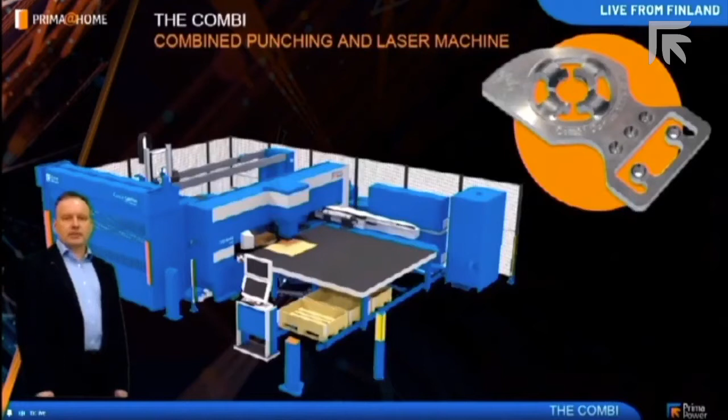The Combi is a combined punching and laser machine. It looks like a standard punching machine, but we have just integrated a laser into the setup. In the picture about the part, we see a few very typical details of what we can make in one setup: diamond marking, forming, tapping, bending, punching, and in the end, laser cutting. All in one setup.

First of all, the punching is done with the servo axis, meaning high accuracy, high tonnage, low power consumption. We have high tool capacity on our turret, all the tools available like that. Right next to the turret, we have a very flexible tool called laser. Combining these two technologies, we get the best of both worlds: low power consumption, high tonnage, high accuracy, and all the features and flexibility together with the laser.

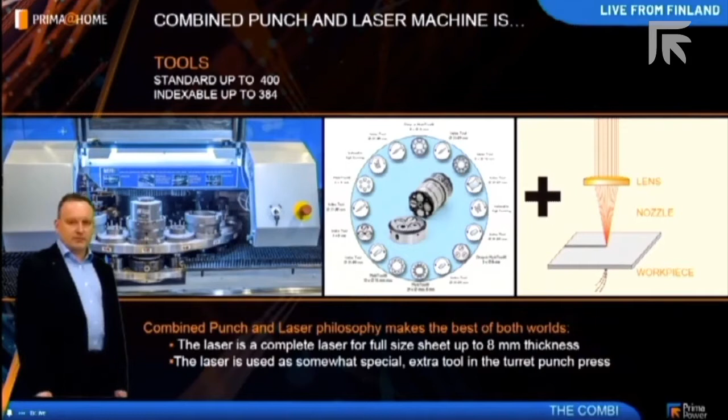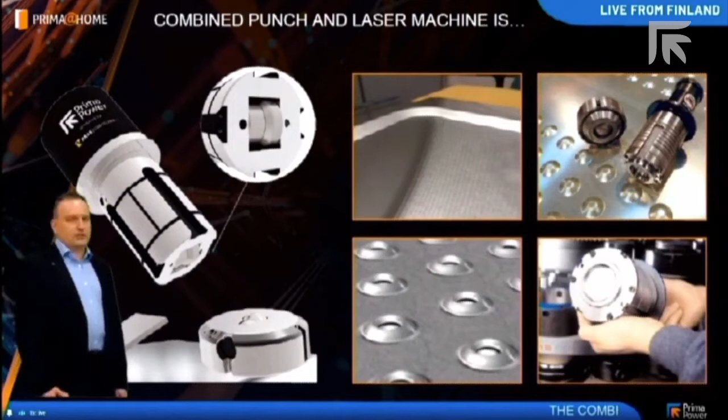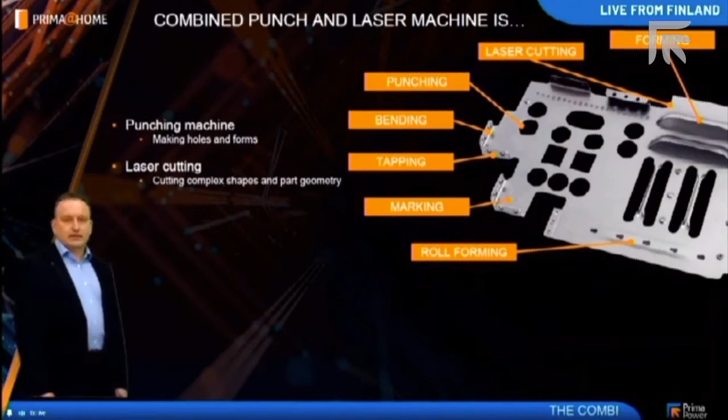These are typical examples of what we can make with our accurate forming. You might recognize these from your own parts as well. So, in one setup: punching, bending, forming, wheeling, tapping, and in the end, laser cutting. Together with the automation, we have fast and reliable part stacking from the cutting process.

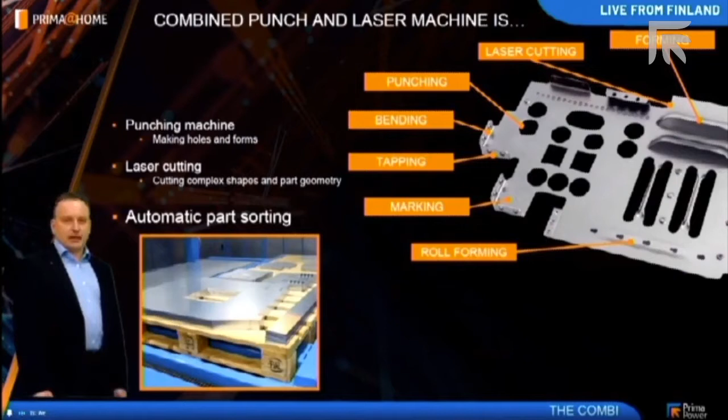So in practice, there are no limits for part design. Here we see a very complex corner opening, almost impossible to make with punching. We need the laser in order to get this skirt bending. At the same time, we have extrusions for tappings, for example, so we need the punching and forming capabilities as well.

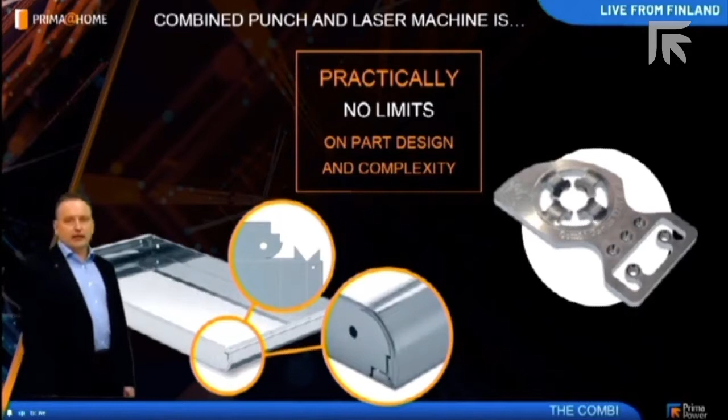We can start with a standalone machine with manual operations, all these mentioned features inside the setup. After a while, we discover we need more capacity, so we add a robot to the system to handle more valuable tasks while the machine is still running. Together with wagons, the world opens for a third stage when we bring storage into the system. With this combination, we have a fully equipped setup for lights-out production. And by the way, we have been building Combis for over 30 years already.

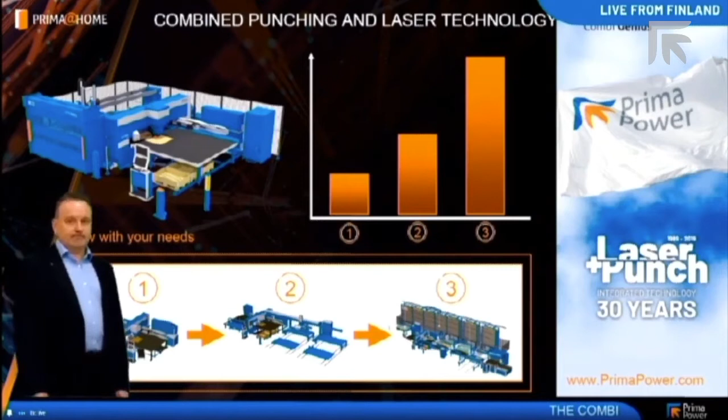We can make these parts with the standalone machine. To get more capacity, we have it with the automation. Even more capacity, we add bending to the process, direct connection. So laser punching, buffering and bending, LP-BB line.

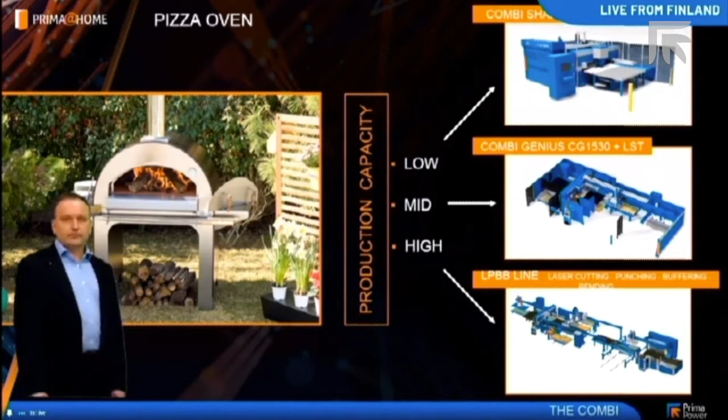When we need such combination, as seen on the example, complex parts, high radius curves, sensitive material, high volume. Typical material thicknesses, 0.5 up to 0.8.

Thanks to the forming capabilities, we give you tools to develop your products. Decrease material thickness, increase quality, and have cost savings. Typical segments: stoves, home appliances, kitchen products, cabinets. Also contract manufacturing, thanks to the flexibility.

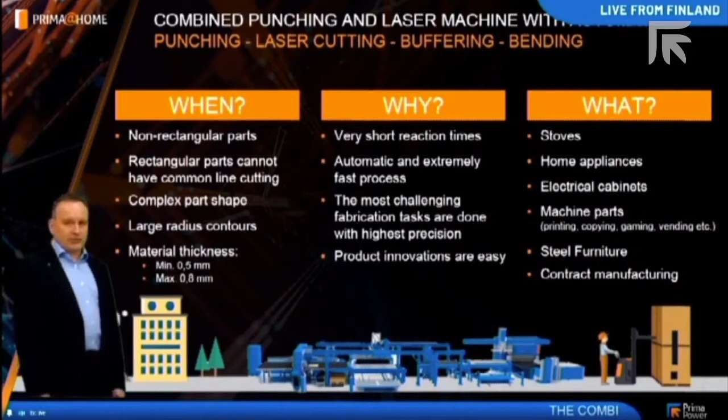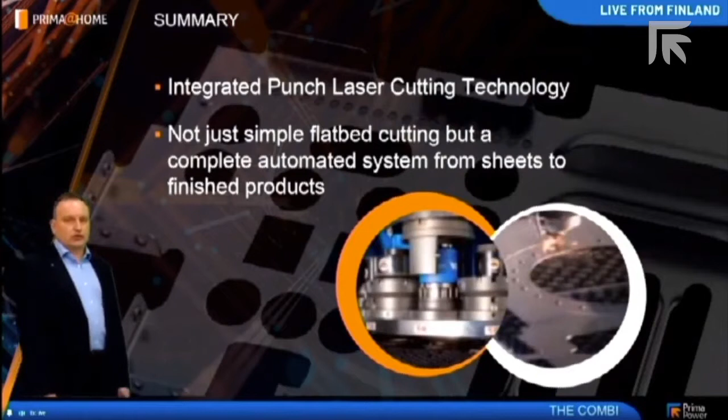So in summary, the combi, it's integrated punch and laser cutting technology. And not only cutting, but with the automation, fully equipped solution from sheet to ready parts.

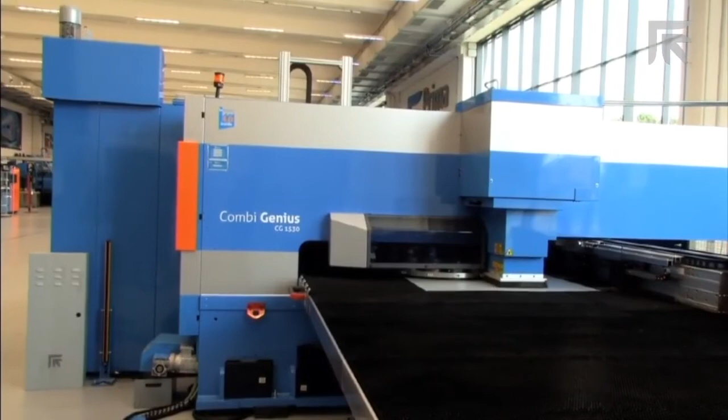Kevin, we have talked about the touchless technologies. This one, I guess, is touching. Yeah, it's touching a little bit, yes. But it's a servo-electric machine with the power of 30 tons that allowed us to reach the speed of 1000 hits per minute of nibbling, and allow us to cut and punch up to 8 mm of every material, so aluminium, stainless steel and mild steel.

The turret itself can have up to 400 tools, and it is equipped with 2 index mechanisms, one to rotate the tool holders, another one to rotate the ram. And these 2 features enable us to reach a number of 384 indexable tools in one turret, with an indexing rotating speed of 250 RPM.

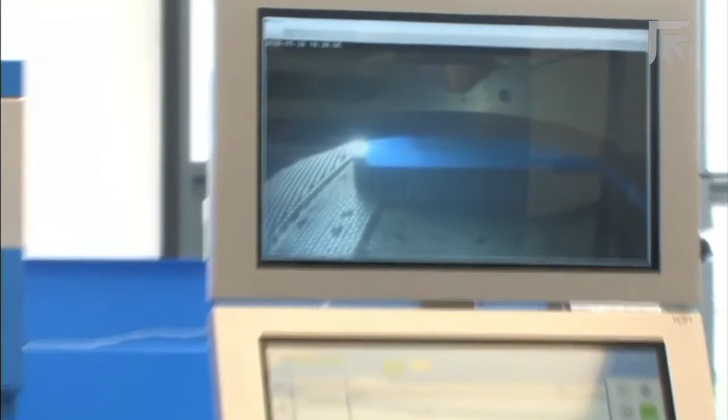Right now we are punching this part with the open chute run. We keep the work chute open, and we manage to unload each part in 1 second each. It's also possible to have other 2 chutes under the cutting head that allow us to unload other small and bigger parts as well.

Okay, now the machine is cutting a little bit bigger part which does not fit through the drop doors. We could of course unload it with the Compact Express, but we want to demonstrate how you can easily access the machine if you run single part production or prototypes, or some material which are very sensitive and you don't want to risk having any scratches on the surface. So Kevin will unload the part.

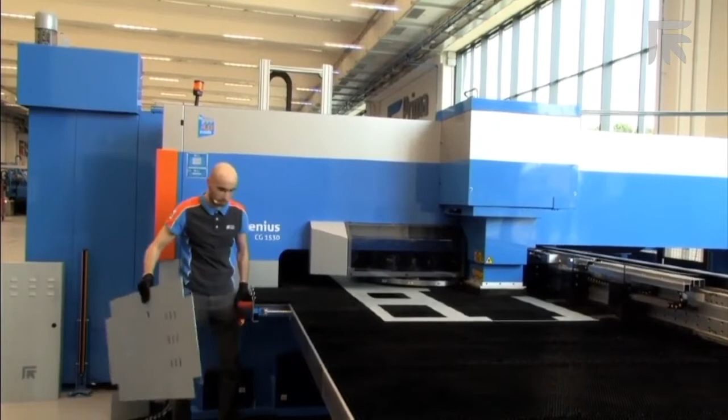So the machine stops as programmed. There is a fast opening door on the table. Easy to remove the part, close the door, and restart the cycle.

So this is the part that we cut. Here we can see a little bit of forming, and of course here on the bottom we have our logo fully punched. And here, next to the blank sheet, we have the ready bent part as a final product.

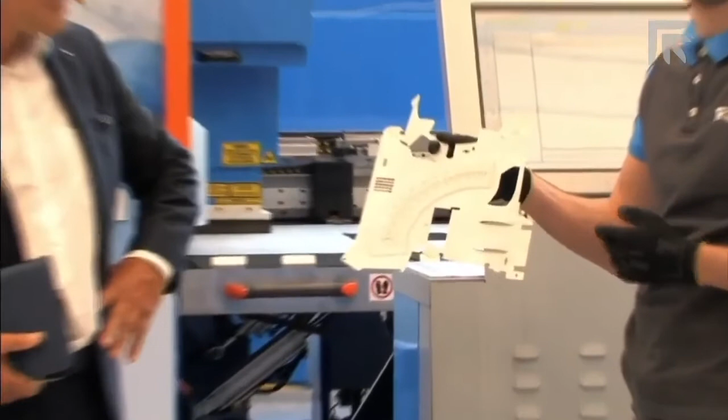It's beautiful, isn't it? Okay, but Kevin, here is one part which looks pretty complicated. Can you explain something about this? Yes, this is a very special part because it allows us to see the capability of the machine. Because here in this part, there is a lot of forming, a lot of wheeling, a lot of punching, and laser cut, everything inside one part.

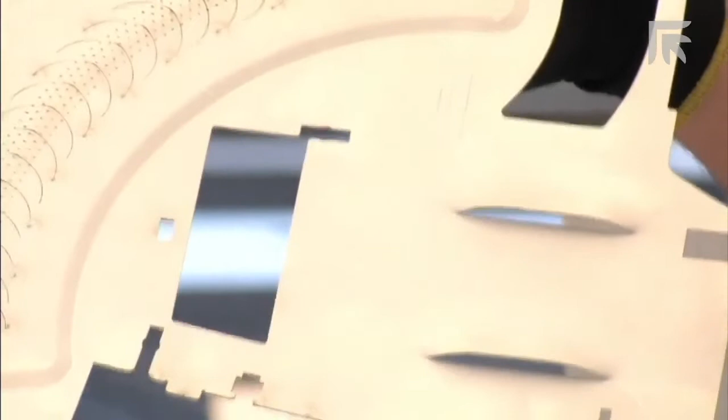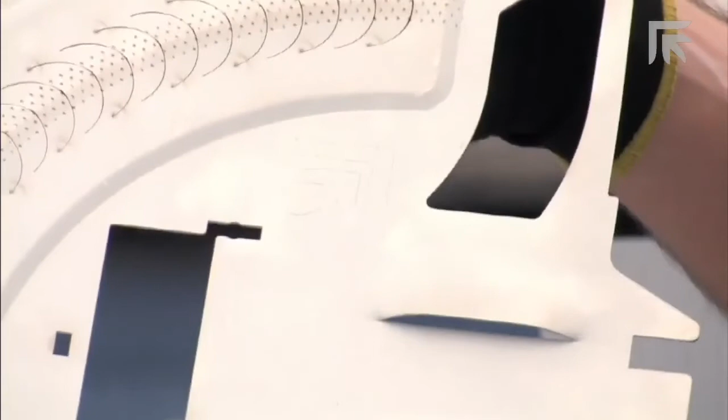There are also a lot of marks here on the part. Yes, we have a few technologies for marking. We have the diamond mark, we have the stamp mark, and we have the laser cut, the laser marking as well. But now the machine is making the unloading.

The Compact Express has a loading, unloading cycle time of just 10 seconds. And the name Compact Express comes from the fact that the layout of the Compact Express version is exactly the same as the layout of the standalone machine.

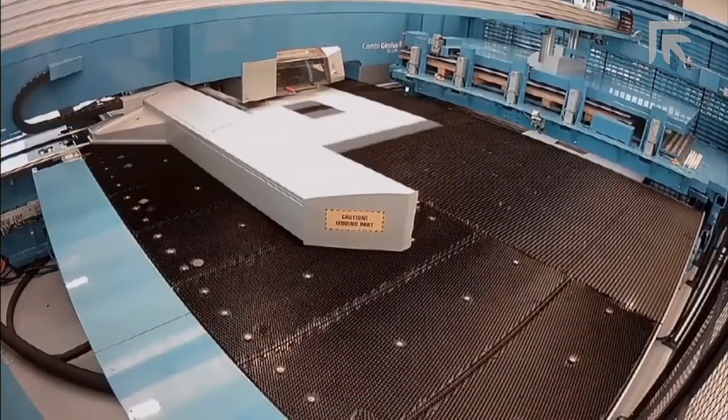Where the Compact Express is presenting our basic level automation, we can also have a look at the more advanced automation. We have one CombiGenius installed and connected to a night train with the LSR loading and stacking robot in Finland. So, please show your machine.

Stacking robot connected to the storage. Now we are going to see a little bit different configuration. The punch and the laser side is the same, but now we have an automatic robot for loading and stacking. This whole combination is connected to the storage called Night Train. Now let's go see the machine in action in our showroom.

The product manager for the system.

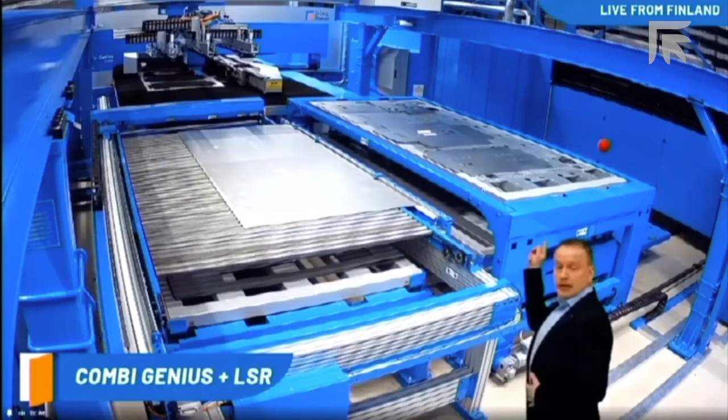Bending. We have buttons to handle the cassettes in and out. We have 3 cassettes at the moment inside the system: one for the stacked parts, one for raw material, and one for the skeletons. Over here, we see the next sheet already waiting to get installed, loaded to the machine.

Now we are going to see the robot in action. We pick the part automatically from the laser process and take it to the stacking cassette. Right after that, we load the next sheet to the punching and laser process. At the same time, we unload the skeleton away from the machine. Immediately after that, we start to prepare the next sheet for the machine.

So we see fully lights-out production simulation here. Now we start to take the next sheet and we make pre-centering, and the production continues. That's it, what I wanted to show you.

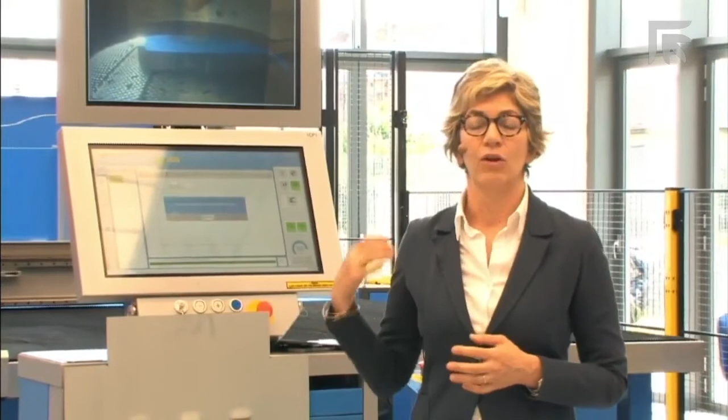Thank you. I'm here close to this CombiGenius, and I want to start again from the human-machine interface. As I announced before, here we also have a human-machine interface based on the Tulus platform. The name is Tulus Cell. It offers many functionalities, especially a very nice and easy to use graphical interface for the tool turret and also optimization of the task list.

If we think about how to manage the programming of this machine, we have to think about NC Express, the CAM system that optimizes the programming according to a specific nesting algorithm, taking care of freeform shape nesting and also square nesting.

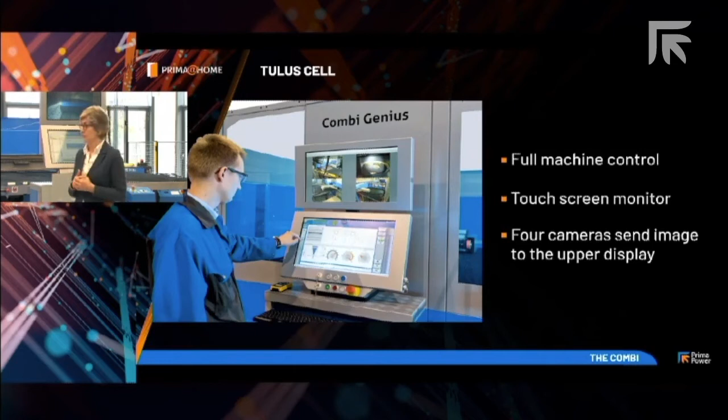As HMI, we also have Tulus MOPA, another application based on the Tulus framework. MOPA stands for Machine Operator Personal Assistant. It's an Android application that can run on a tablet, so the operator can take the tablet with him or her and stay close to the machine, especially for operations like setup or manual intervention at the turret tools. So the operator can easily avoid going back and forth between the machine, the turret position, and the main user interface, because he has his tablet with him. This is the scenario that takes care of the control and programming of the machines.

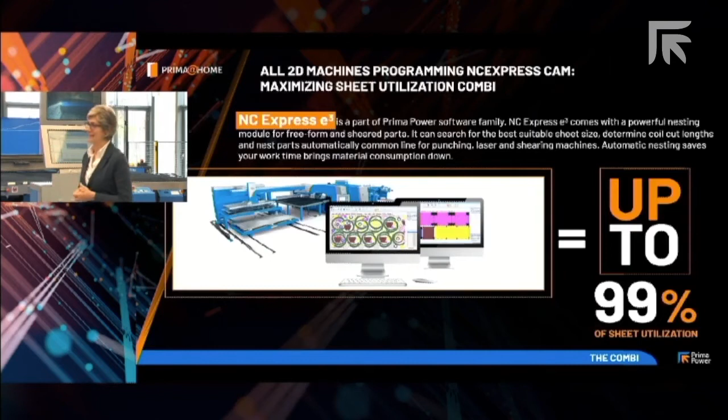So, Marty, a very interactive presentation with Ivana and Kevin as well. I think you lit up the interest of our audience because we have received a lot of questions. I picked one coming from the US: what material thicknesses can you work and process with the CombiGenius?

Well, first of all, we can punch any material up to 8 millimeters. The maximum sheet weight is 250 kilos. With the 3 kilowatt laser source, we can cut brass, copper, aluminium, stainless steel up to 6 millimeters, and mild steel up to 8 millimeters. With the 4 kilowatt laser power, we can cut all materials up to 8 millimeters.